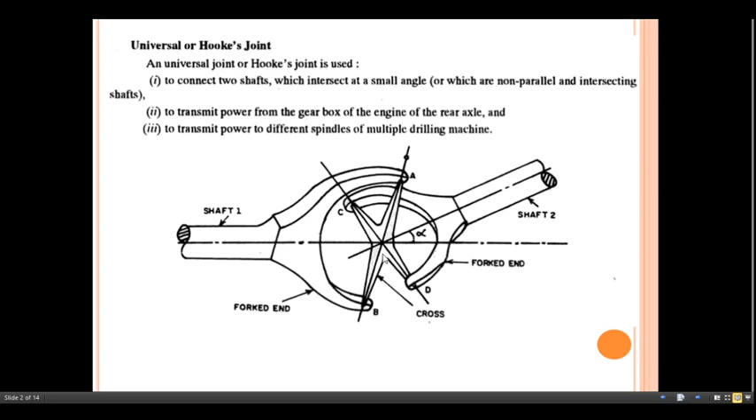It's used to transmit power from the gearbox of an engine to the rear axle, and to transmit power to the spindles of a multiple drilling machine. Here is the driving shaft, and here is the driven shaft. There is a small inclination alpha between the driving shaft and the driven shaft. This is known as the fork end of the driven shaft. Both shafts are connected with each other by this cross or intermediate piece.

So we can do the analysis of the Hooke's joint. Here this shows the front view and the top view. This indicates the front view of the two shafts which are connected by a Hooke's joint. The inclination between the axes of the two shafts is alpha. If the joint is looked at along the axis of shaft 1, the fork ends of this shaft are A and B, as shown in this figure, and the second ones are C and D.

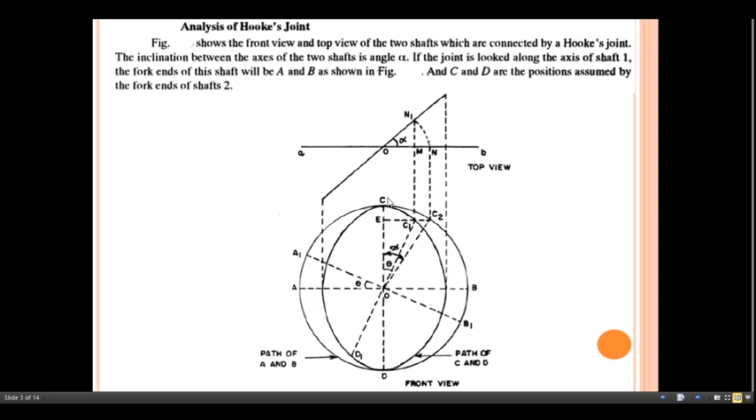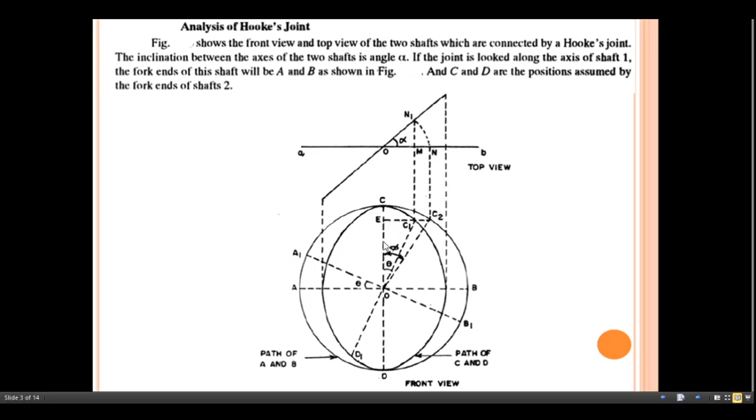C and D are the positions assumed by the fork ends of shaft 2. AB indicates the end position of the fork of shaft 1, and CD indicates the end position of the fork end of shaft 2. Next, as shaft 1, the driving shaft, starts to rotate, its fork ends A and B move in a circle. A will move towards point A1 and B will move towards point B1.

So this moves in a circular way, but the fork ends C and D of shaft 2 move along the path of an ellipse. If you look along the axis of shaft 1, from one particular direction, the path followed by the second shaft is an elliptical path. Now C will be displaced to point C1, and D moves towards point D1. So this is the circular path followed by A and B, and this is the elliptical path followed by C and D. D will shift towards D1.

Now, for shaft 1, the displacement of point A up to A1 and B up to B1 makes an angle theta with the horizontal line. Let the fork end C take a new position C1 on an ellipse in the front view, but the true angle made will be seen when it is looked at along its own axis, in which case C and D move in a circle. To find the true angle, project C1 horizontally to intersect the circle at C2.

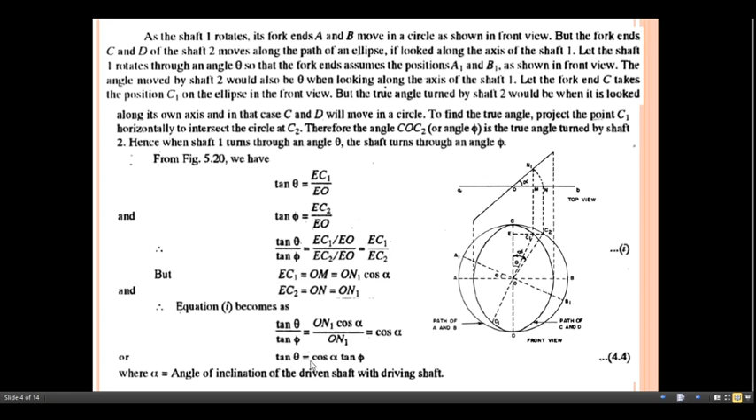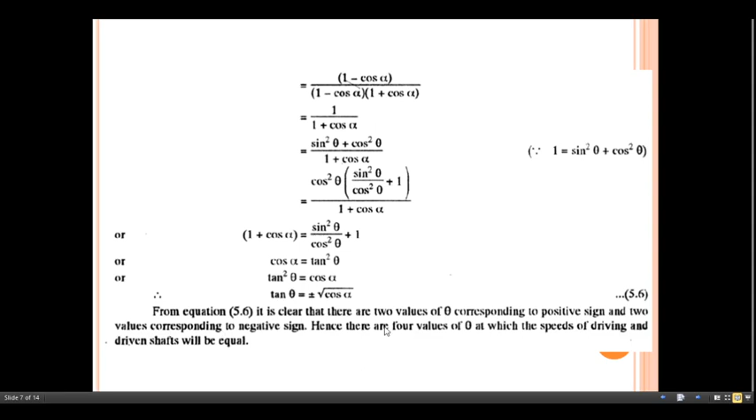Now from this developed relation between tan theta and alpha, there are two values of theta corresponding to the positive sign and two values corresponding to the negative sign. Hence there are four values of theta at which the speeds of the driving and driven shafts are equal. Next is the maximum and minimum speed of the driven shaft. The ratio of the speeds of the driven and driving shafts is given by this relation.

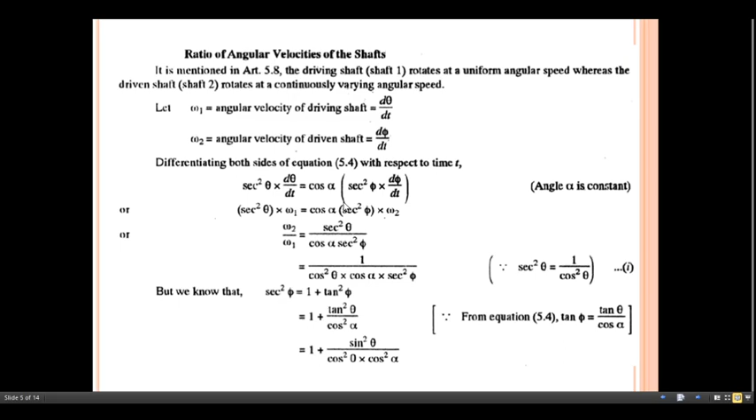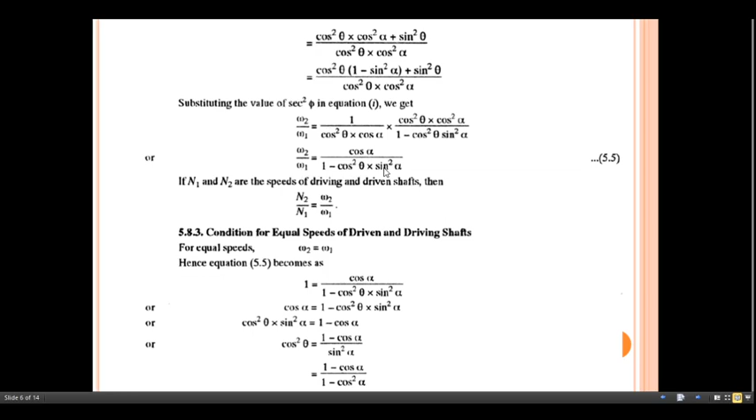Omega 2 by omega 1 equals cos of alpha. We already developed this relation in the previous step: omega 2 by omega 1 equals cos of alpha divided by 1 minus cos square theta into sin square alpha. Now my focus here is to develop this relation for the maximum speed.

Omega 2 is the angular velocity of the driven shaft, and omega 1 is the angular speed of the driving shaft. So how can we get the maximum speed? For that, look at the value of alpha and the value of theta. The speed of the driven shaft will be maximum for the given inclination of the shaft.

For the given value of the angle alpha, the speed is maximum when the denominator of the above equation is the minimum, so this term should be a minimum. For that, look at cos of theta; it is the only variable here.

If I substitute theta as 0, what will happen? The cos theta term becomes 1, since cos of 0 is 1. So for this, theta must be 0. Then 1 minus cos square 0 times sin square alpha leaves 1 minus sin square alpha.

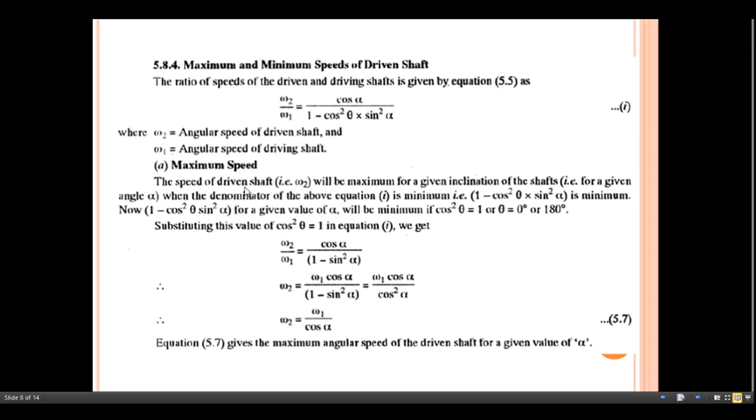Look at the denominator of that previous equation. For the maximum speed, the denominator must be minimum, and to get the minimum speed, the denominator must be maximum. For the given value of alpha, how is it possible to make this maximum? Substitute theta as 90 degrees or 270 degrees.

What does theta as 90 degrees mean? If I substitute cos of 90, we get 0 for this term; cos 90 or cos 270 is directly 0. So we get 1 minus 0, and omega 2 by omega 1 equals cos of alpha. So omega 2 equals omega 1 multiplied by cos of alpha. This equation gives the minimum angular speed of the driven shaft.

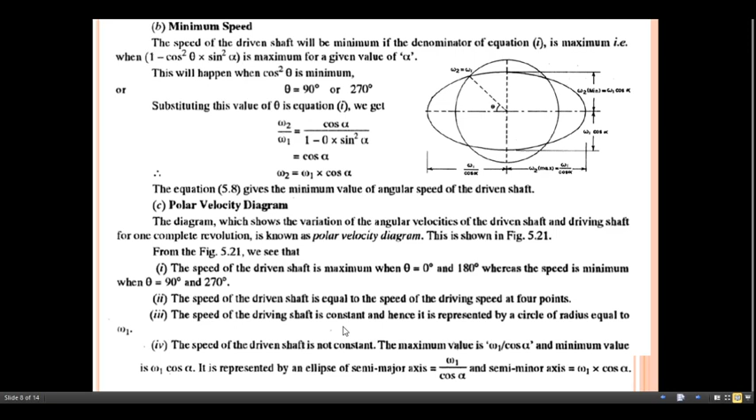Then the maximum fluctuation of the speed of the driven shaft. From the previous equation we have the minimum speed and maximum speed. Taking the difference, we get the maximum fluctuation of the speed of the driven shaft. Omega 1 divided by cos of alpha is omega 2 max, and omega 1 into cos of alpha is omega 2 min. So omega 1 by cos of alpha minus omega 1 into cos of alpha. Taking omega 1 as common, 1 divided by cos of alpha minus cos of alpha remains.

Make the base common: 1 minus cos square alpha divided by cos of alpha. 1 minus cos square alpha is sin square alpha, so we get sin of alpha divided by cos of alpha multiplied by sin of alpha, which is tan of alpha into sin of alpha. If alpha is small, sin of alpha and tan of alpha are approximately equal to alpha. So the maximum fluctuation is omega 1 multiplied by alpha multiplied by alpha, that is omega 1 alpha square. So the maximum fluctuation of the angular speed of the driven shaft is directly proportional to the square of the angle between the two shafts.

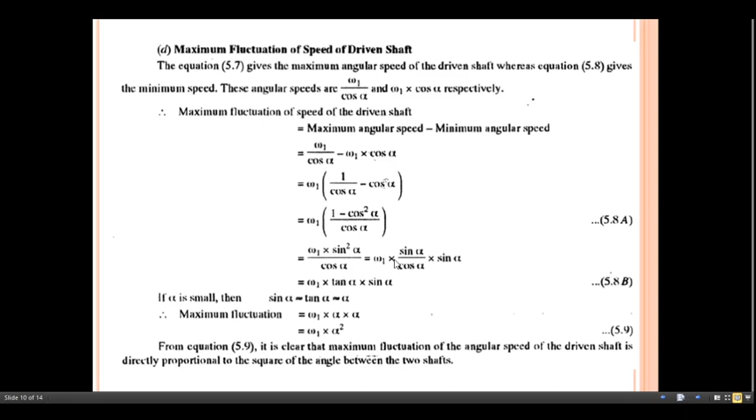Now the angular acceleration of the driven shaft. We already have the relation omega 2 by omega 1 equals cos of alpha divided by 1 minus cos square theta into sin square alpha. So the angular velocity of the driven shaft is given by this term, with omega 1 moved to the other side.

Okay, so omega 2 equals omega 1 multiplied by cos of alpha divided by 1 minus cos square theta into sin square alpha. Now, to get the angular acceleration, differentiate this omega 2 with respect to t. Once we differentiate this term, we already have the omega 2 term from the previous relation, so you have to differentiate this term with respect to time t.

For that, omega 1 remains as it is; you have to differentiate this term, omega 1 cos of alpha divided by this term. So here is the step: cos of alpha d/dt of 1 divided by 1 minus cos square theta into sin square alpha. This one is constant, so take it outside of the derivative sign. So here we get omega 1 multiplied by cos of alpha, and you have to differentiate this term.

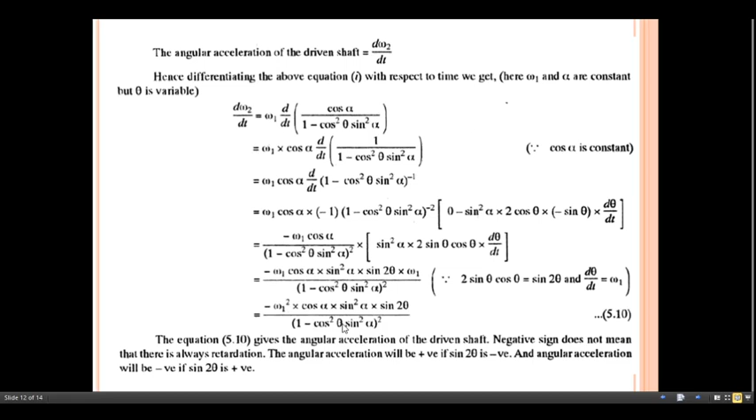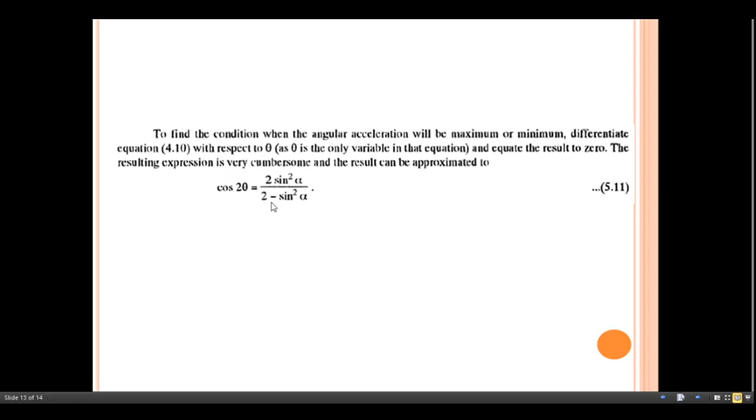To find the condition when the angular acceleration is maximum or minimum, differentiate this previous equation again with respect to theta and equate the result to 0. The resulting expression is very cumbersome, and the result can be approximated as cos 2 theta equals 2 sin square alpha divided by 2 minus sin square alpha.